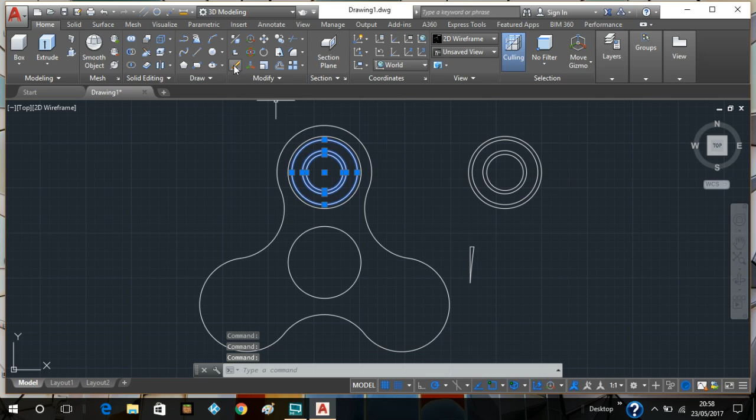So as you can see, this object here is going to be the object that was from the first part of the video. And what we're going to do is we're going to select these items up here. We're going to copy them over there. Now we're going to select these items here. We're going to delete them. We're going to select these items here, and we're just going to move them

over here. This item here, we're going to copy it. We'll use a center point, and we're going to put the one in there. Now, as just seen, I didn't just copy it from the center point and go straight through there. That's for a reason. I went right the way around there. Reason being is if I go in through there, there's no center point and a circle appears. If I go around and hit the arc of the circle, the center point, there you go, appears.

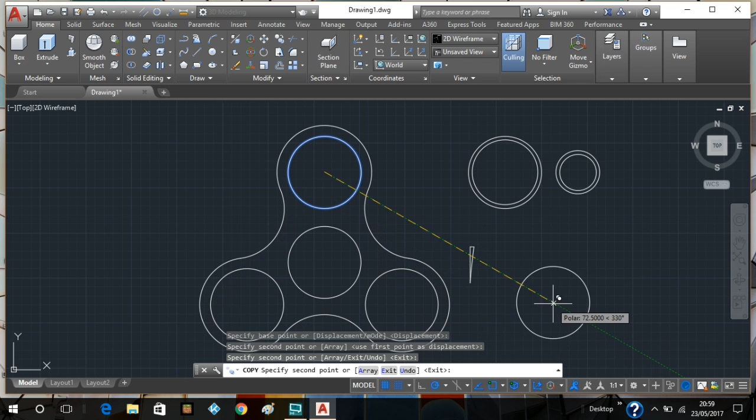So to get them to appear, you've got to come in from the edges of the circle. That was just a quick one there. Right click, left click, enter. So first what I'm going to do, I'm going to extrude these. And we'll give that maybe an extrusion height of 8.

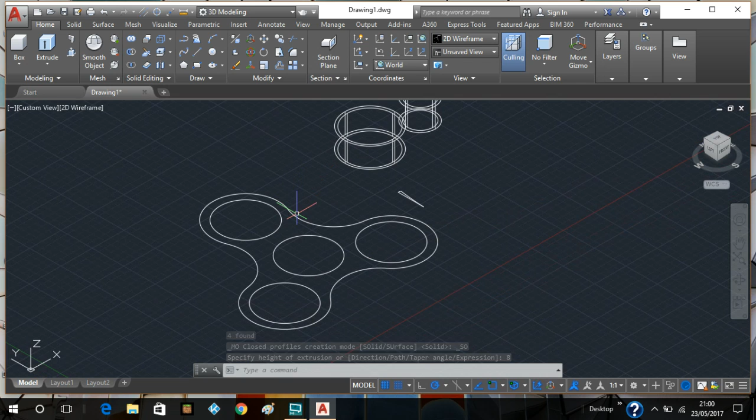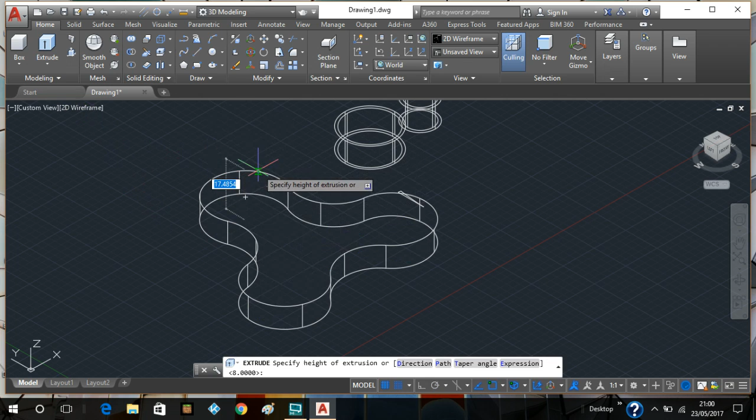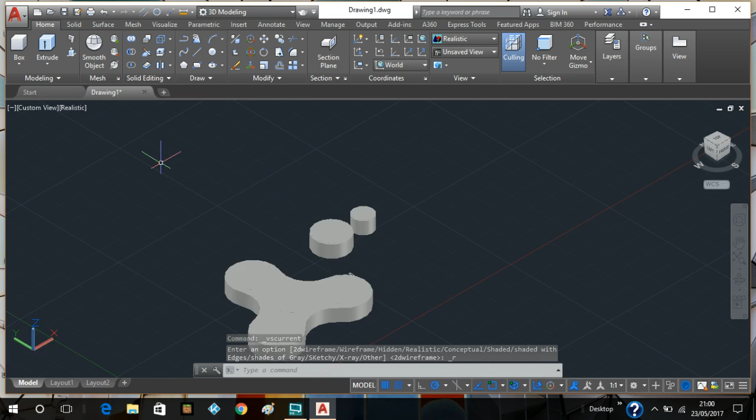Now what I'm going to do is go into realistic. In fact, no I'm not. I'll go back to 2D wireframe. Now I'm going to use this function here. This is solid subtract. Okay. Left click. I'm going to select this outside object here. Left click, right click. I'm going to select this inner object.

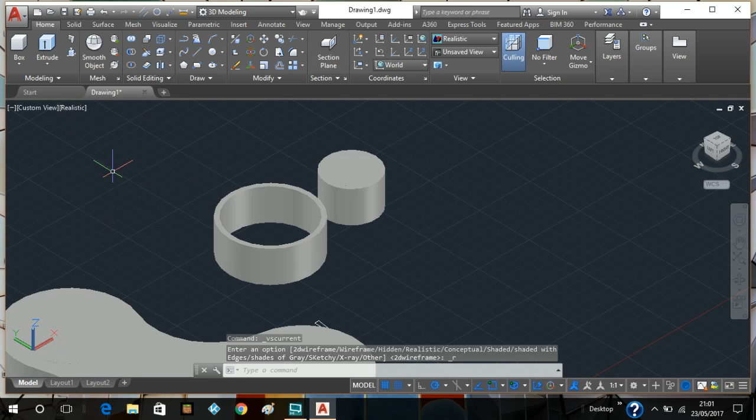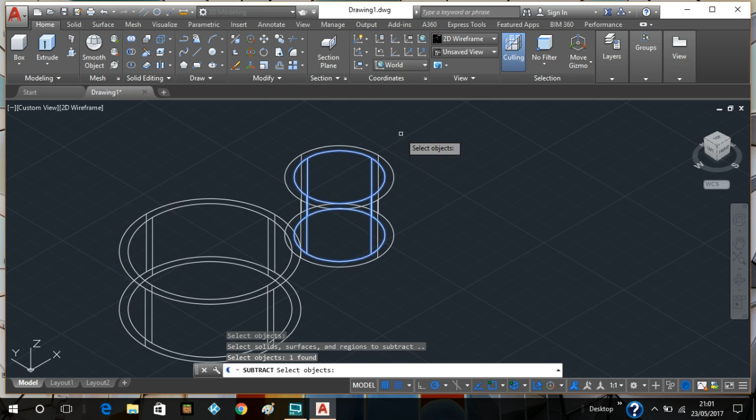Left click, right click. Now see what happens when I go to realistic. There you go. It takes the center out. Solid subtract. I'll do the same again. I'm going to solid subtract. I want to keep this item here, so I keep the outside item by pressing left click, selecting, right click. I'm going to select this bit here because this is a bit that I want to get rid of. Left click on it, then right click, and again we'll just go into realistic, and there you have it.

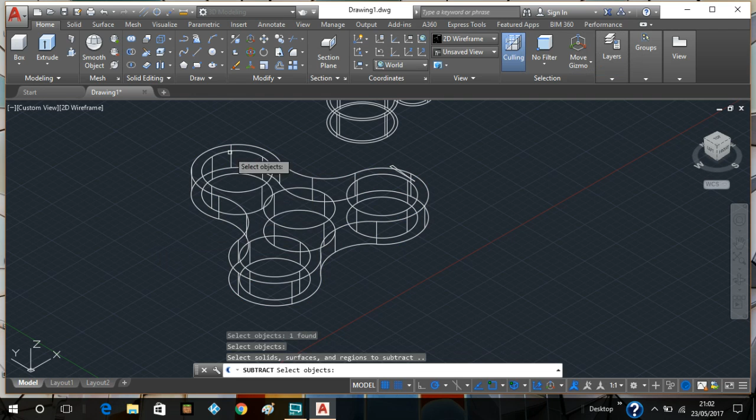Back to 2D. I'm going to do the same with this object here. Go back to it. We want to keep the fidget spinner, so I'm left clicking it, right click. Now I want to make these holes, left click, left click, left click, left click, and I'll right click that. I'll go into realistic and you'll be able to see what I mean. So there you go, you've got the basic objects there. I'm going to go back in the 2D wireframe. I like to work in 2D wireframe, it just makes things a lot easier.

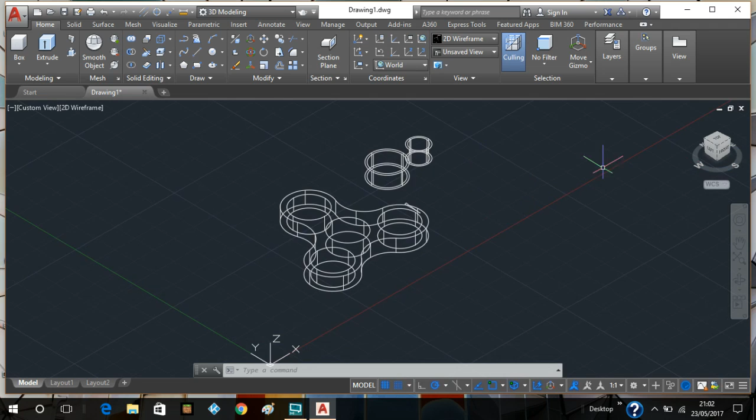Now I'm going to select this item here. I want to move it. Select the move. I get my center point. I want to move it to the middle of there. And it snaps into place. Bear in mind, you've got to have all your object snap settings on.

Okay, so if nothing's snapping in place, you need to go down here, go to object snap settings, and make sure in the snapping grid that is on, and I like to have the polar snaps selected. Again, when you're working 3D, make sure your 3D snap is on, object snap, so on and so forth. So it's really important. I think I covered this in my first video, that you've got all those object snaps in place.

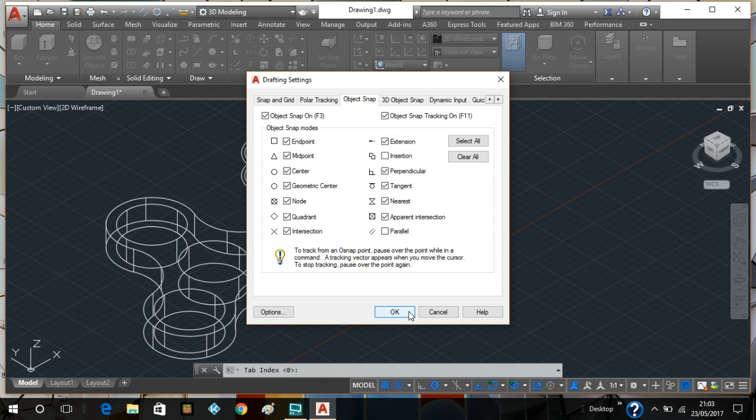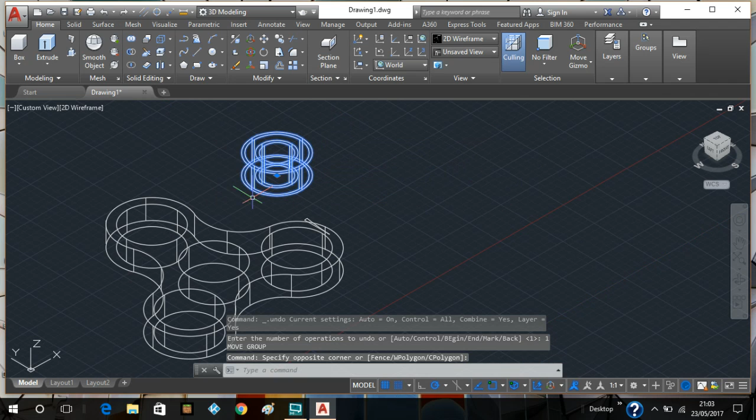So we're going to select this item here, and I want to put that into place. So select that, I'll zoom in a little bit, center point there. Actually, I'll go back, I should have copied that to be fair. Start again, copy function. Try that again, because I'm not too sure if I actually grabbed the center of that. Apologies, YouTube. That's better.

And notice that I'm waiting a little while for that little green circle to appear, and that's just saying that I've caught the object snap in the middle. There you go, little green circle. Now I'll go back into realistic, and there you go. Right, so now what I'm going to do is go back into 2D.

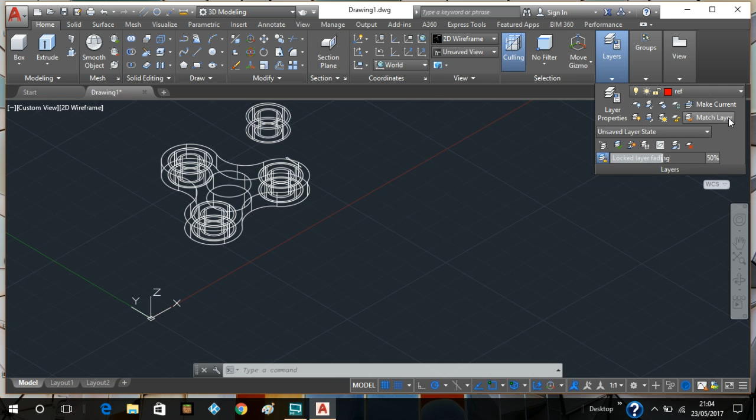I'm now going to change layers, and remember we set the layers up in part 1 of this video. I'm now going to do a line from there to the center, right click, left click, go to repeat line, do the same again. Probably thinking, why is he doing this? But all will become apparent shortly.

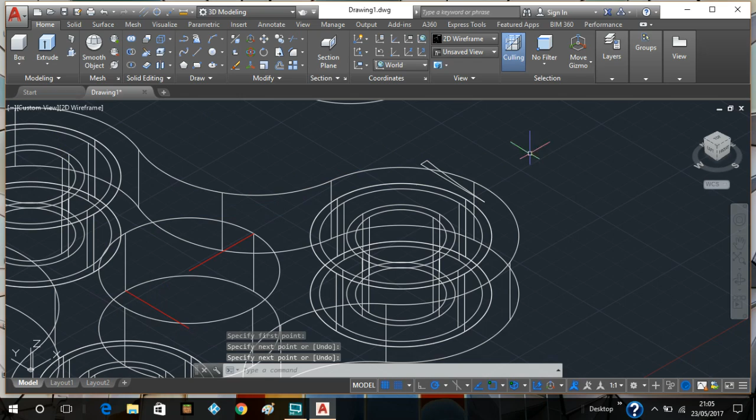Now what I want to do is, I need the bit where you actually grab the fidget spinner, you hold between your index finger and your thumb. I'm going to develop that bit now. And this bit here, again we did this in part 1, is what we're going to develop.

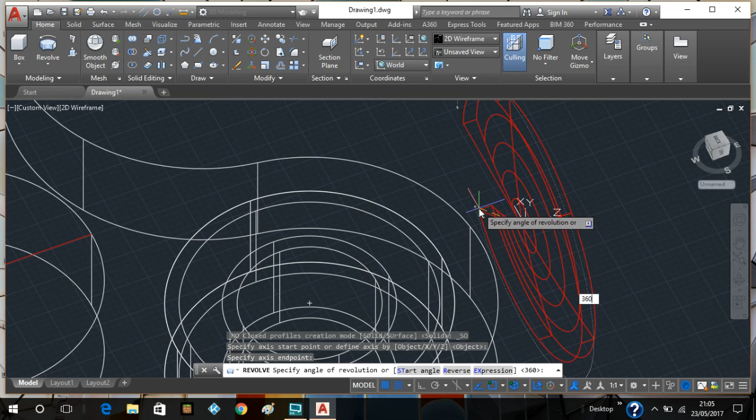So we'll select this item, we'll go to this drop down here, and we'll go to revolve. We're going to select that there and that there, and that's going to be the axis point. I'm going to type in 360. Bang. Dead easy. This item here, I'm going to change back into layer 0 because I want it the same colour as this.

Bear in mind I've got these lines here. These lines are going to be my reference lines. There's different ways you can actually do it, but me personally, I prefer just to create my own little reference lines. You could do it with this button here, which is going to be the 3D align button, but I just personally find it easier to use my own reference lines. And bear in mind these are a different colour to this, just so that I don't get confused, because I do get easily confused.

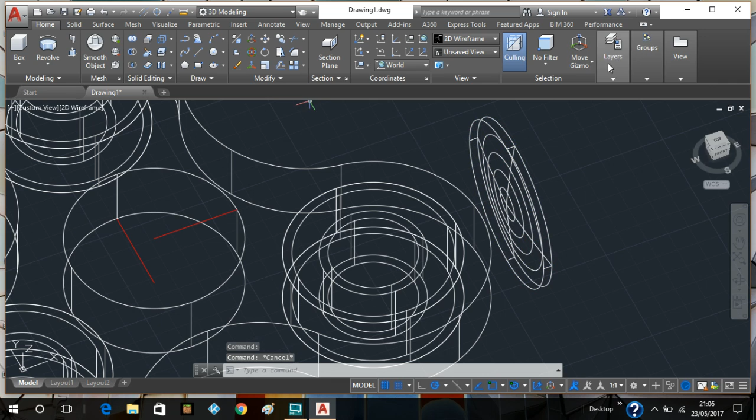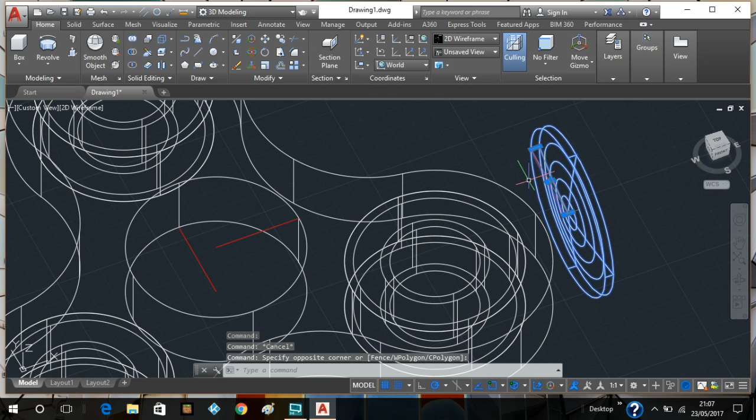Now what we're going to do is copy that. In fact, no, I'll do another reference line while I'm on, and we'll make the reference line. We'll just get that snap. Remember, have your snappings in place. Lovely jubbly. Now I'm going to copy it. Just copy button. Actually, I'm going to go to top view, make things a little bit easier for myself. In fact, I haven't quite got that one, that reference line.

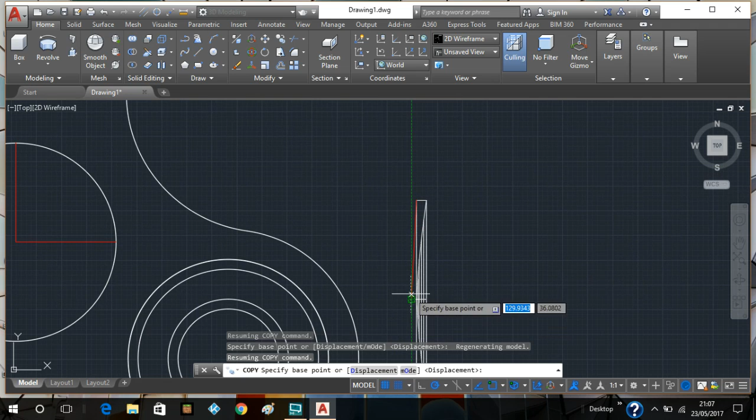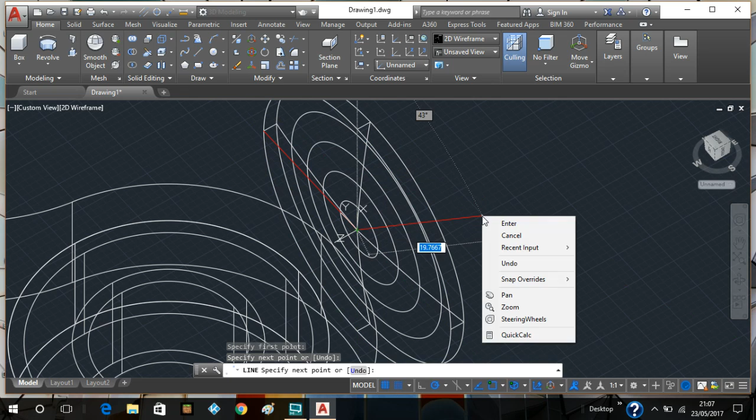Now if you go to top view, you can see my reference line actually sticks out a little bit. That should be flat, so I'm going to get rid of it. I'm going to try that again. So I'll delete it again, select a line. Yes, it's a little bit slow paced, but these are the problems that you do come up against when you use CAD. So that'll do. And we'll go on the top. There. That line is now nice and flat.

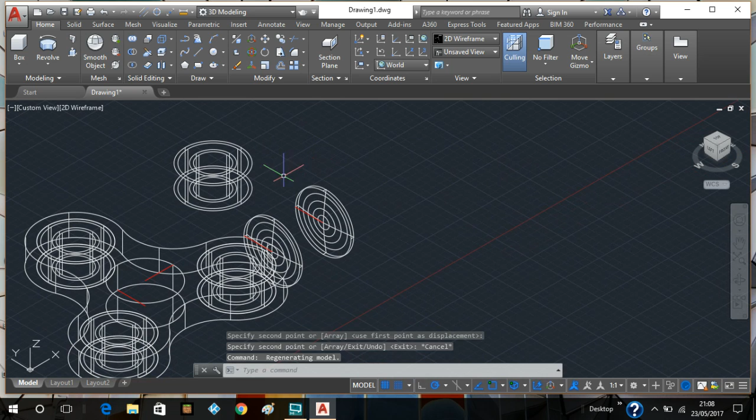Great. Okay. So what I'm going to do now is copy. Doesn't matter where. That there. Escape. Now I'd like to rotate them. So I'm going to select that object there. I'm going to select the 3D rotate command, left click.

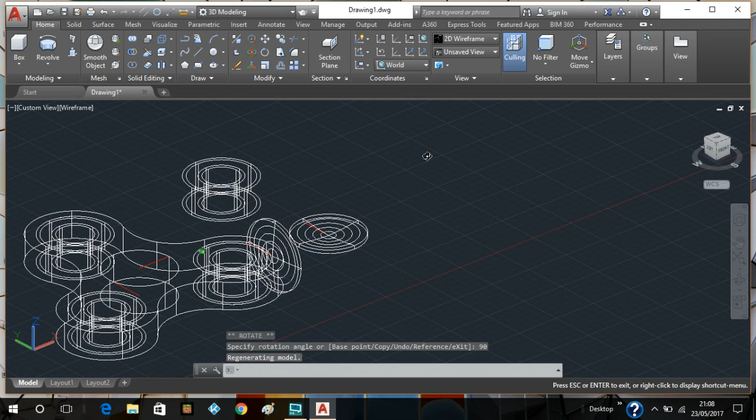Now I want to select the green plane. I'm going to type in 90, and that has rotated it correctly. I'm going to do the same with this object here. Focus. We'll go from the top. In fact, what I'm going to do, I'm going to move it a little bit further away. I'm going to move that to there.

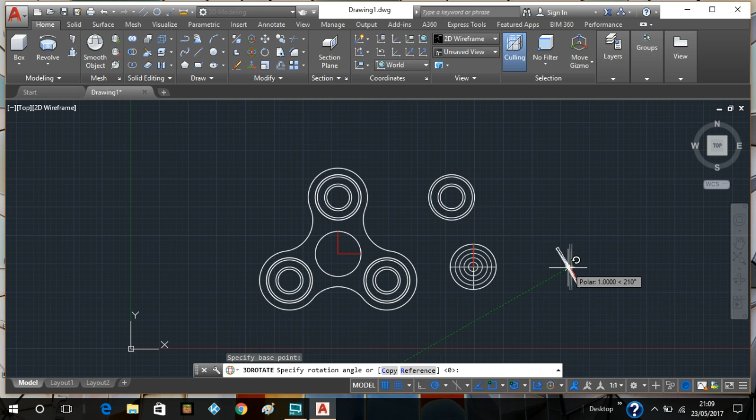That'll do. I'm going to go to 3D rotate, specify base point, doesn't really matter. Sorry, I'll go into the southwest view there. Give that another go.

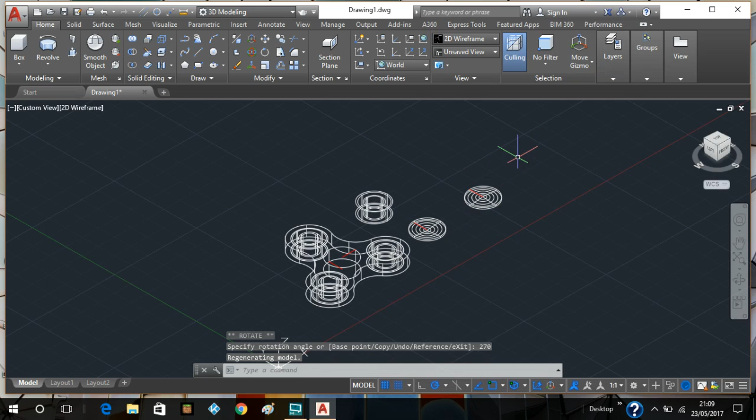That's better. 3D rotate. So I rotated this one 90 degrees. So I need to rotate this one 270 degrees. So there you go. As you can see, if I just go into the realistic view, this one is going to go on the bottom of my fidget spinner, and this one is going to go onto the top of my fidget spinner. Because there is a flat area, if I rotate it, it will be slightly convex underneath there. And obviously this one's convex on the top and flat underneath.

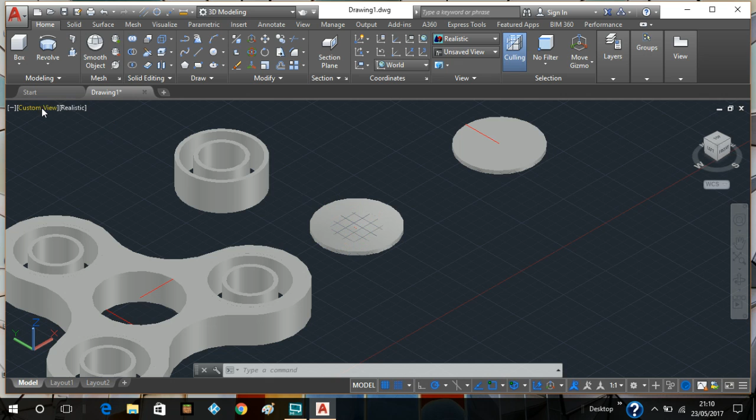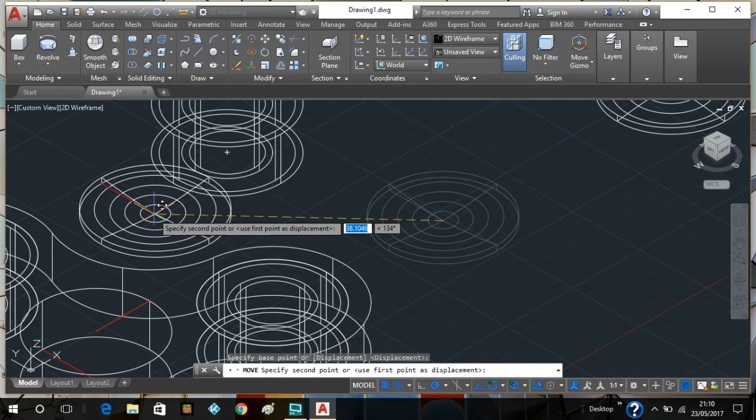So to facilitate getting them put into place, I'll just jump straight back into 2D wireframe, select the whole thing, and I'm going to move this onto the top. I'm going to locate the end of the first reference line I made, and I get a snap, probably a square, and when it turns to a square, that means I'm in place.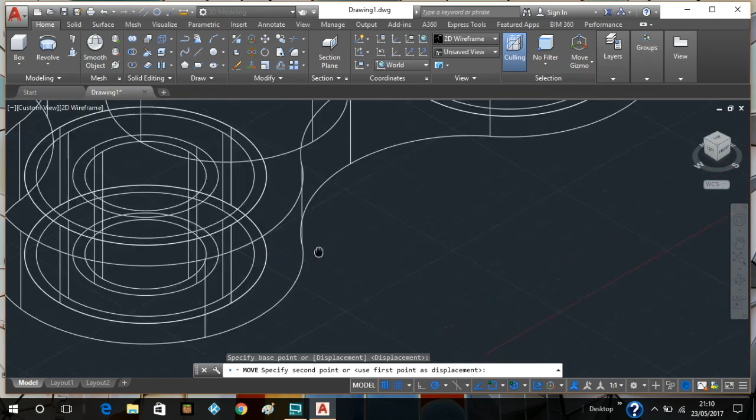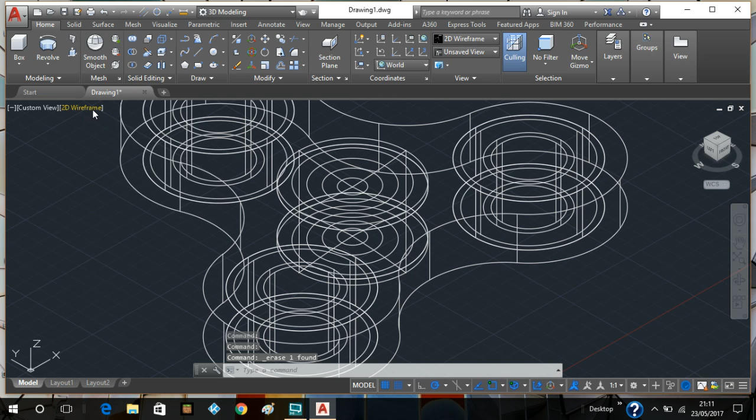I'll do the same with this. I'm going to move it. I'm going to select the end of that red line. I'm going to put this on the bottom of that red line, and when I see a square, it's in place. Great, that's fantastic. Worked out lovely. I'm now going to get rid of these lines. Delete. And delete. What I'm now going to do is go into realistic, and there we'll have a fidget spinner. Great.

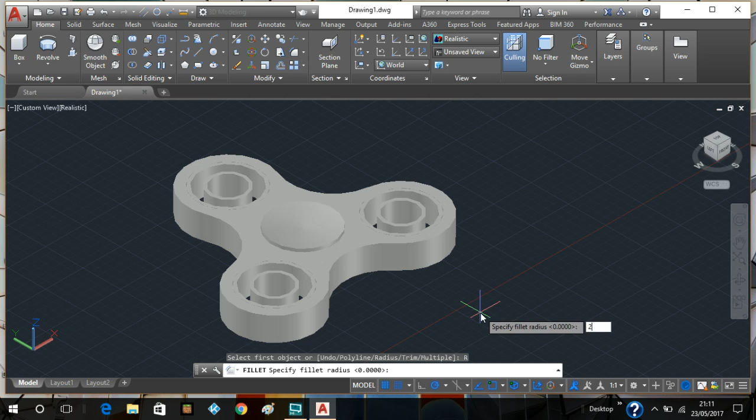Now, to be honest, it doesn't look that real, so I want to make it look a little bit more realistic. So what I'm going to do, I'm going to start adding fillets. So I'll select the fillet, I'll set the radius, and I'll maybe give that a 2, enter. I'll enter again, and what I'm going to do is just go around all the edges. And if you're not sure what I'm talking about, just bear with us. I've selected all those edges, and I'll give it a right click, and they should change. Enter, and there you go. I'm going to do underneath.

Actually, while I'm on, I'm going to take the grid off. It's getting in my way a little bit. If you haven't got a 2017 version of AutoCAD, all you do is type G, or grid will come up and just switch it off. The on-off options will come on down here, and you just select off. With 2017, you've actually got the little command there, and that's gone.

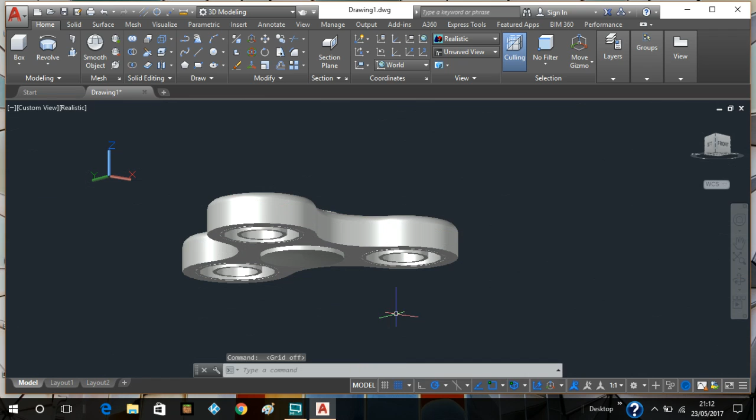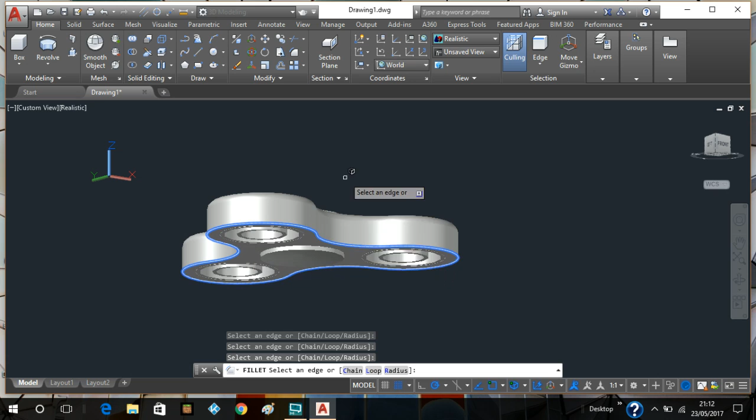Okay, so I'll do the same again. Select fillet up there. Remember, my radius has already been set by myself. Enter, and I can go around the rest of the edges. That's it. One more. Right click, enter. Lovely. I want to give these edges a radius now. So I'm going to select again. Now I want that to have a smaller edge radius, so I'll put maybe 0.5. Let's see it. That'll do. And I'll press enter.

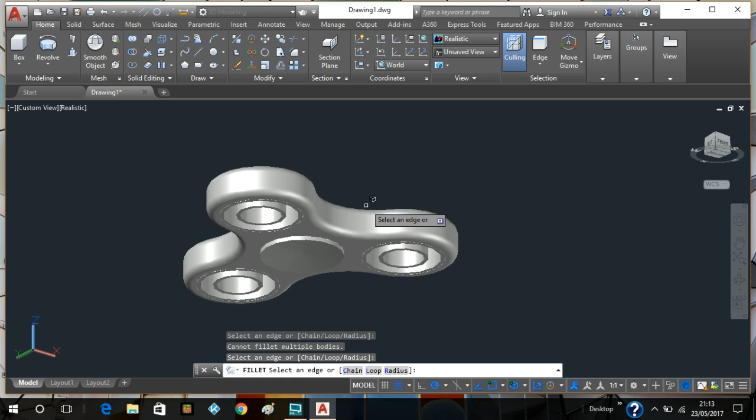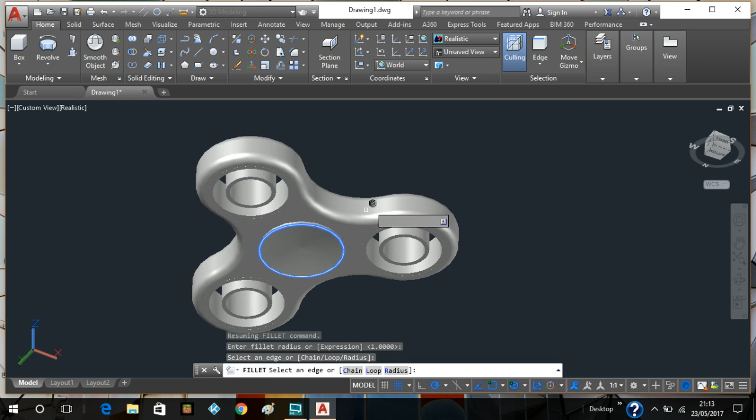It'll have to be a 1, it won't give us a 0.5, so I'll do that once more. Bear with me. 1. That's better. That's great. Right click. And there you go. That looks nice. See how it's starting to take a little bit more shape now? I'll do the same again. I'll select this object. Right click, enter. And there you go. It's starting to look a little bit more realistic. I think you'd probably agree.

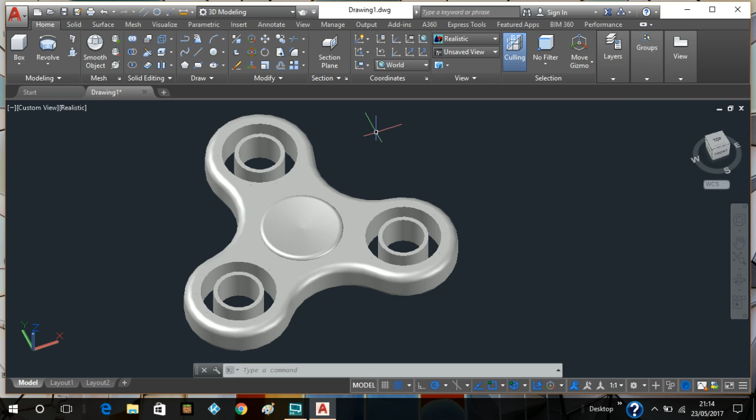I'm not going to go into too much detail. If I want to go into a little bit more detail, what I will be doing is putting the ball bearings in the run around here. I'll develop the run a little bit more. That'll be pretty much out of the scope of this video, so I'm not going to do that. I'm just giving you a good idea of what AutoCAD is actually capable of.

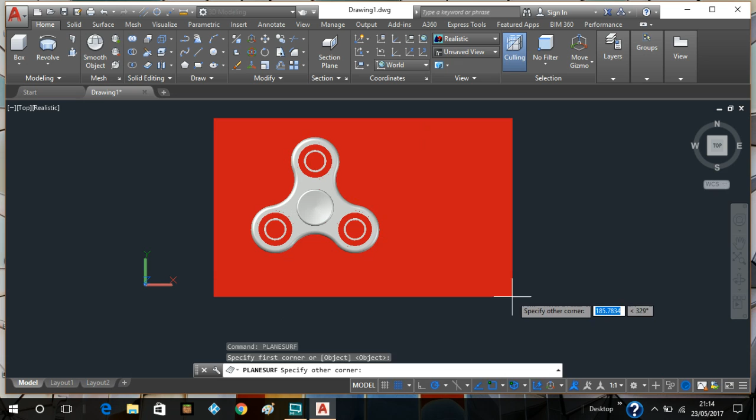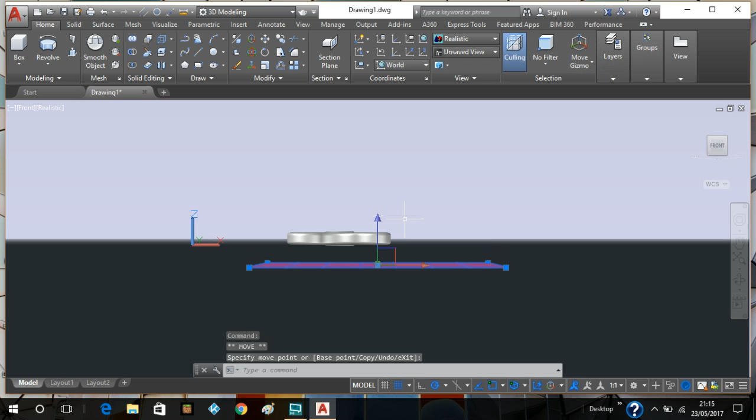Now what I'm going to do is make it a little bit more realistic. I'll put in a context, so I'll PLANESURF. I'll select up here. And I'll give it the side view. I'll drop that down a little bit. I'm going to press move. Sorry, I'll do that again. And select this plane. That'll do. I'm going to go back to the home button there to give us that view.

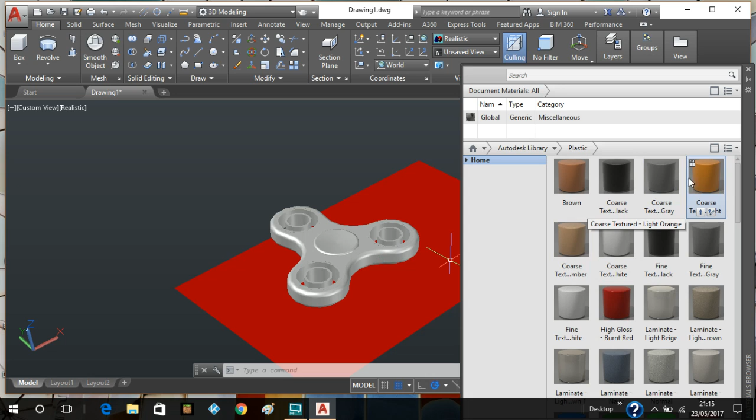Now what I want this to be is slightly different colour. I'm going to type in RMAT. This will open the material browser. And I can start adding colour to my fidget spinner. So I'll click on this drop down. I'll go to, say, plastic. I want to give this spinner a little bit colour, make it look nice. So I'm going to select that, select that. I'll select that bottom bit as well, if I can just get in there. Lovely jubbly.

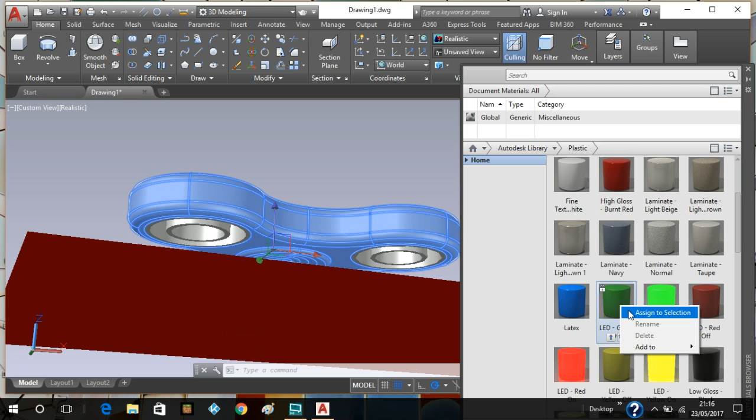And I'll give it LED green, and to make it green I'll hover over the colour I want. I'll right click and I'll left click assign to selection. Remember, this has already all been selected. Assign to selection. Left click on there and it's turned green. Pretty good. Again, I think I want these bits to be metal, so I'll select metal. I'm going to select them all.

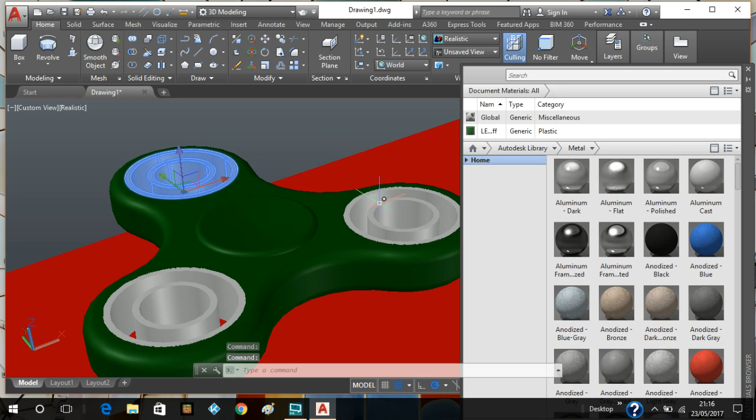And let's have a look. Aluminium polish. I mean, what sort of colour are we going to make it? I don't know. Polished aluminium. Right click, assign to selection. And there you go. Polished aluminium.

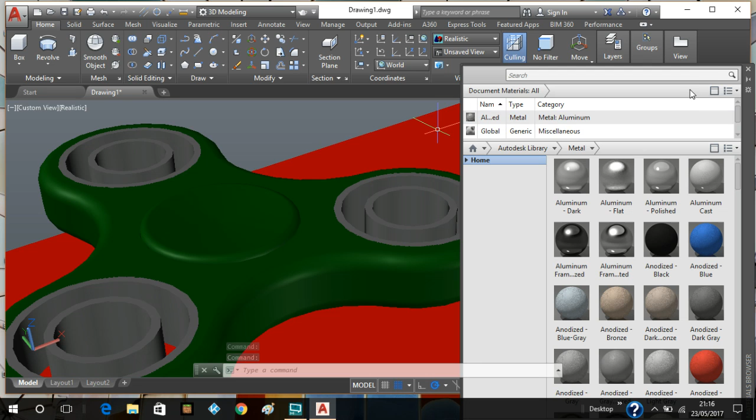Right. I think I'm going to give it a different camera view. So what I'm going to do is, first I'll go to the top, right click and I'll parallel it so it's nice and straight. I'm going to type in cam for camera, left click on camera, and I'll place it over here onto my fidget. Enter.

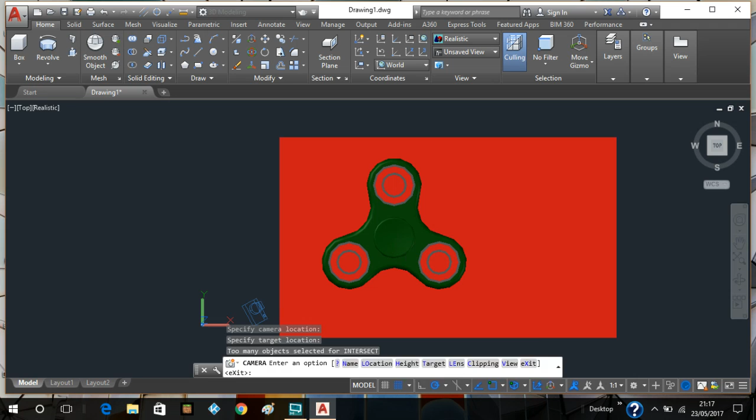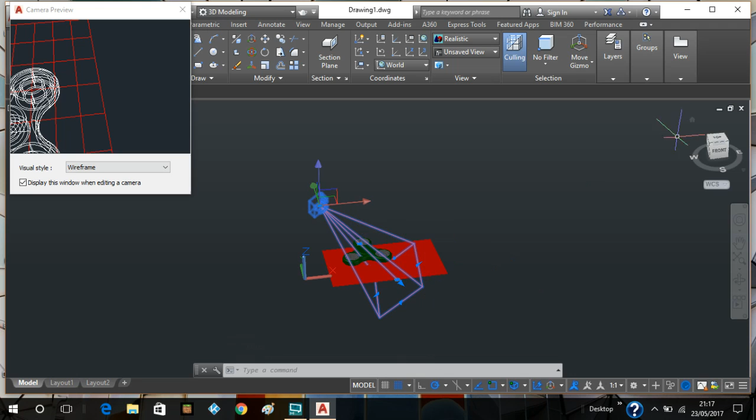Now what I'm going to do, go to home, I'm going to select the camera, and I can just mess about a little bit with that. There you go, you can move it up and down, and you can just mess about with it. It's not quite where I want it to be, so I'll take camera again.

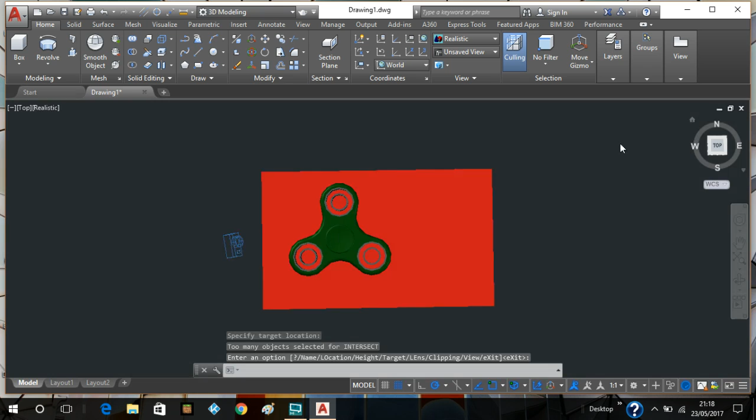I'll place it here. Better. And there, that's a little bit better. Yeah, that'll do.

So now I'm going to go into visualize. I think I'll give myself some shadows. And as you can see, the ground shadows came on there. You can turn your sun status on and off. You can mess about a little bit with that. I'm not going to go into that in this video.

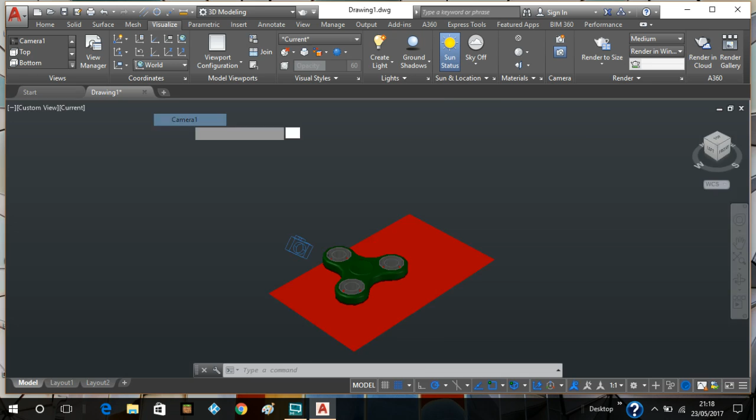Now I think I'll go and have a look and see what my camera view looks like. So custom view, custom model views, and there you go. You've created a camera 1. Looks pretty good. So I'm happy with that. I'll press the teapot button to render it, and it'll give you a photographic image of what it's going to look like.

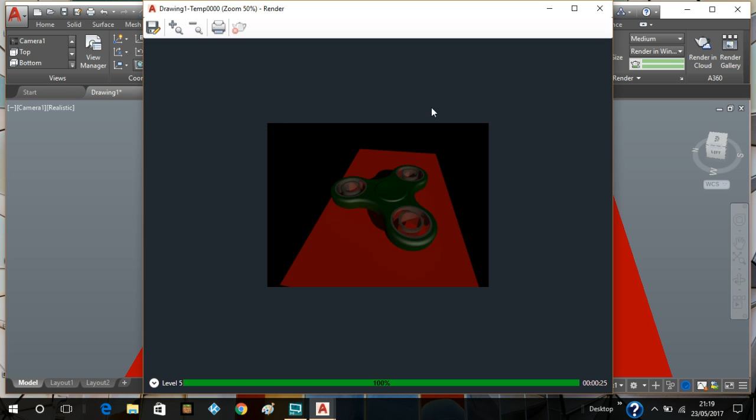And there you go. Again, you can mess about with lights just to highlight the area and stuff, just to make it look a little bit more realistic. But again, this is just a basic video. And there you go. It's looking pretty good. Obviously, you can zoom your camera in and out. It doesn't have to be a camera view. You can just zoom out like that from any view you want.

And if you want this whole image to be rendered like that, that's great. Because you can custom view, we'll press render. There you go. And what the camera does is it just gives you more of a customized view from where you want it to be.

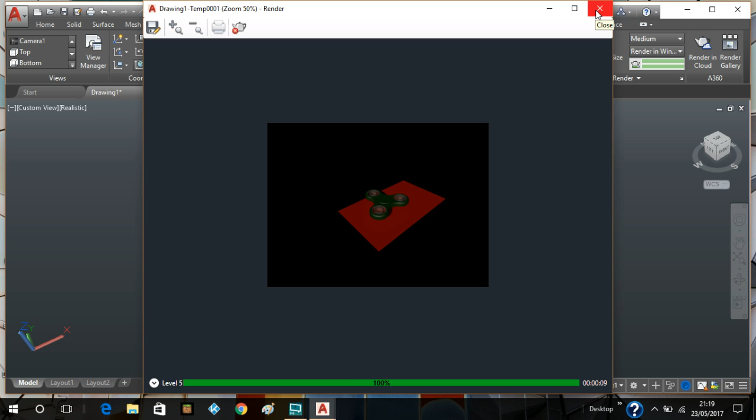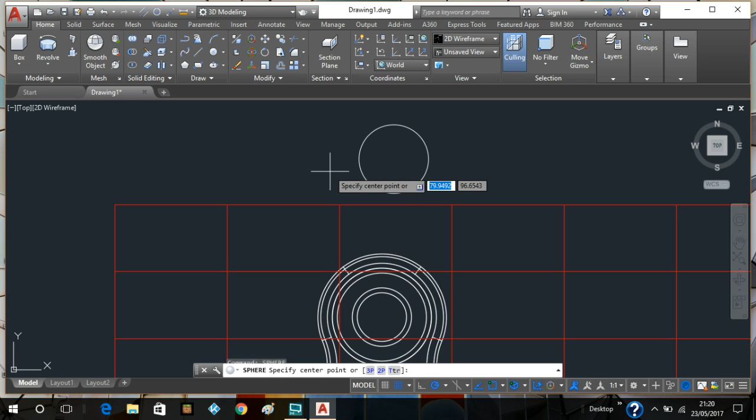In case you actually wanted to have ball bearings of your own, you want to go into a little bit more depth, I'll just give you a brief idea of how to go about that. So I'll just create a circle, and I'll just change the layers over. It's better. Just double check. Now what I'm going to do is type in SPH for sphere. I'll put my first sphere there. It's going to be my first ball bearing.

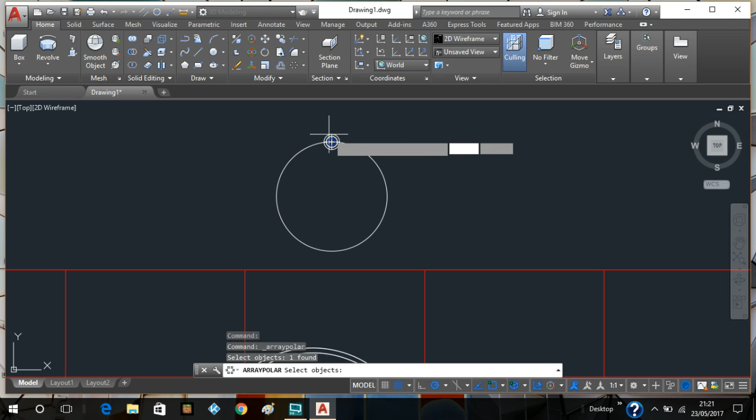What you don't have to do is go around that circle and add the spheres individually. All you would simply do is go to polar array, select this object, right click, and you want to locate the center of your array, which will be here. If your snaps are on, bang, there you go. 1, 2, 3, 4, 5, 6 items. If you want to add more ball bearings, edit it.

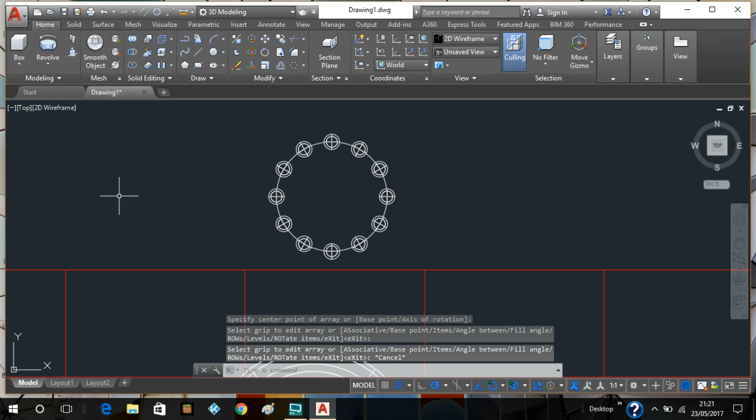There, more ball bearings. You probably think to yourself, well, that doesn't look like any ball bearings to me. What you would do is go to realistic, and there you go. You've got your run of ball bearings. And to get these ball bearings into there, you just convert back to 2D wireframe. You would locate a center point, and you just copy these ball bearings into these runs around here.

So I think that's probably it for tonight's video. I hope you've enjoyed it. It's the second part of the Fidget Spinner series, so it's going to be 2 parts.

I'm just trying to think of any other interesting videos, topical videos I would make. I think I've got 1 or 2 in mind.